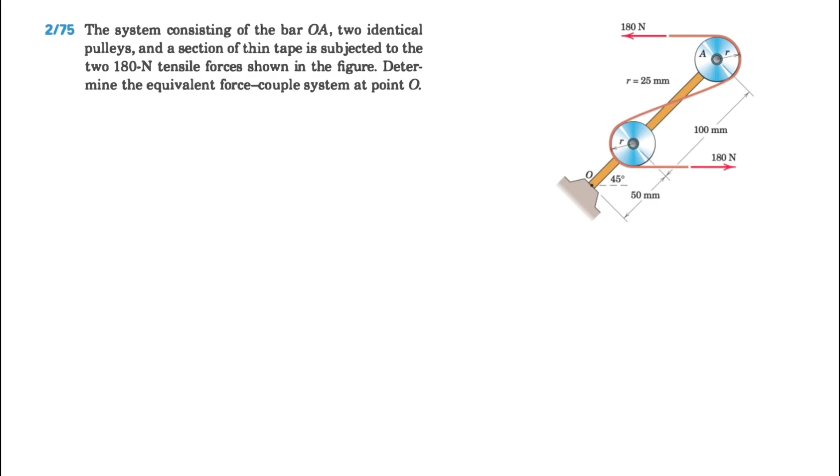So basically we have these two forces, and all we need to do here is to find the force couple system, meaning we need the force and a couple at the end of the question. The force part is pretty easy. We're going to go with the sum of all forces that we can see in the figure. We can call our x and y here. Looking at this, we'll see that the two forces are the same magnitude in the opposite direction and they are non-collinear, which means they're going to make a couple here.

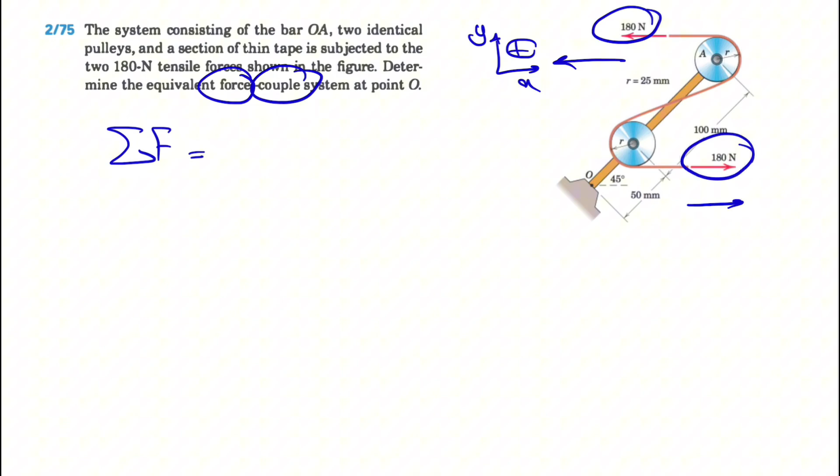So that's the definition of a couple: two forces that are equal, 180, they are in the opposite direction and they are non-collinear, meaning one of them is above the other one or they're not in the same line. So first of all, the sum of all forces will be 0 because the forces are equal and in opposite directions, they're going to cancel each other out, so 0 for that.

What we have basically is a couple of these two forces, and for a couple we have a different method for finding the moment. When we have a couple, we just need to use this formula, which is force times d, and we have to figure out what d is. The d is the distance between these two forces. So all we need to do here is to figure that out, and the rest should be easy.

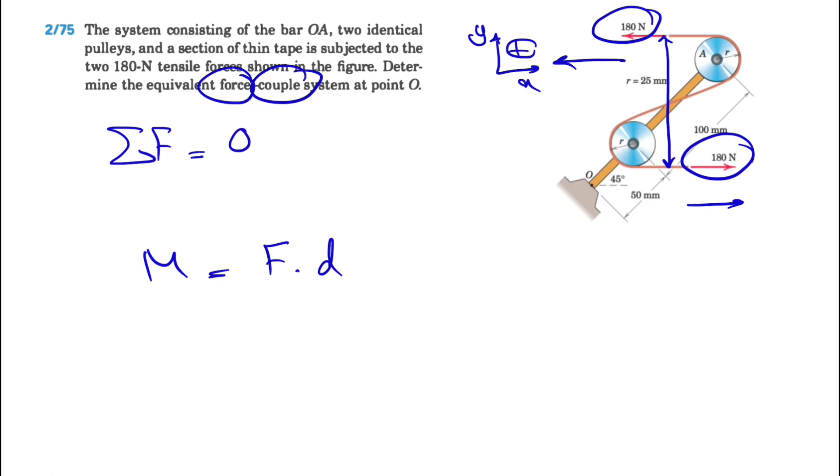So how are we going to find that? The way we're going to do this is to consider this right triangle that I'm showing in red. This angle here would be 45 degrees, and we know the hypotenuse here would be the radius of each of these plus this part. This part is 100 millimeter, so we basically have 100 millimeter plus 2r. If you want to calculate that, it's pretty easy. We basically have 100 plus 2 times 25, so the hypotenuse is 150.

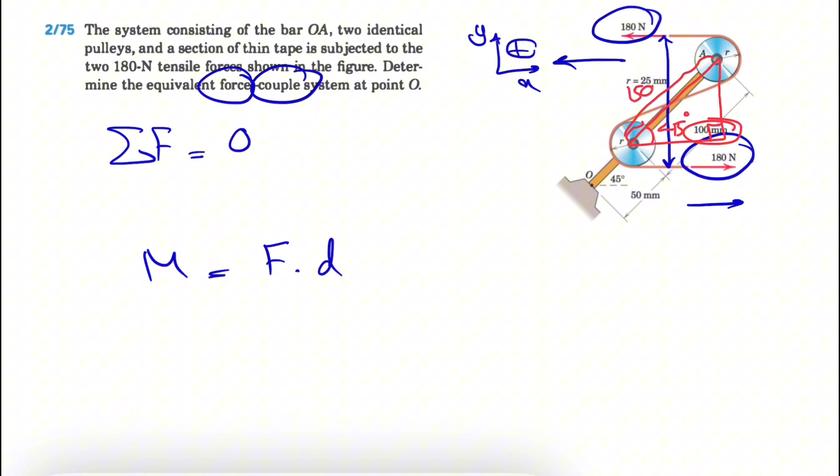So this is 150, and if you want to find our d, I'm going to show it in blue. Our d would be this distance, which is r, plus what we have here, plus another r. This part will be basically 150 sine of 45 degrees. We already have the force. The force is 180, and d would be 150 sine of 45 degrees plus 2r. Each r is 25, so plus 25 plus 25.

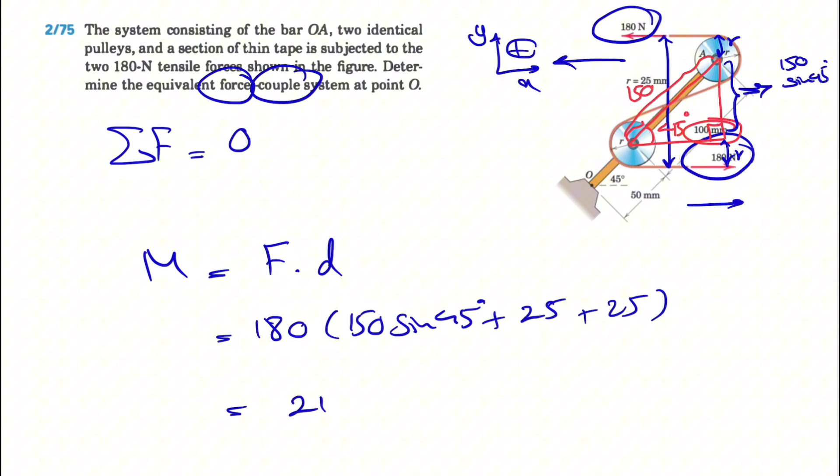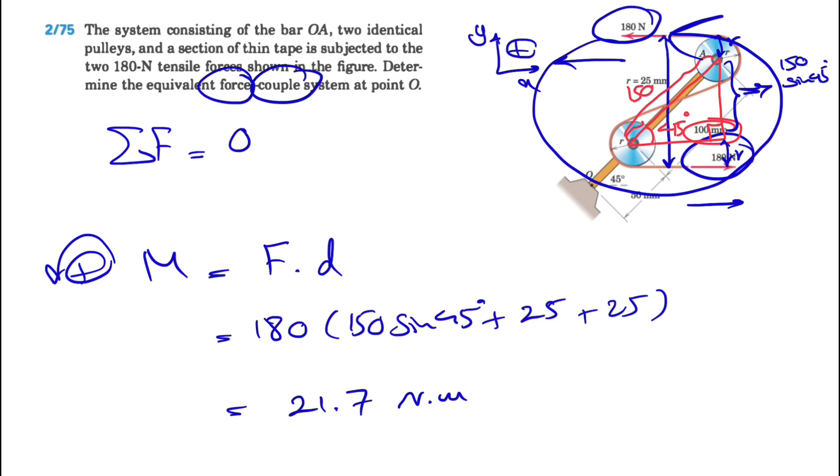If we calculate this, it's going to give us 21.7 Newton meter, and as we can see, the couple is in this direction. So counterclockwise; we're going to call counterclockwise moment positive as always. So counterclockwise, that's going to be our moment. That's one way to do it.

The other way would be to go straight with the moment about point O. If we do that, we need this distance here. For finding that, we basically have this distance here minus what we have here, which is r, and the other one would be basically 50 sine of 45 degrees. So that's one moment from this force, which, as we can see, is clockwise, negative.

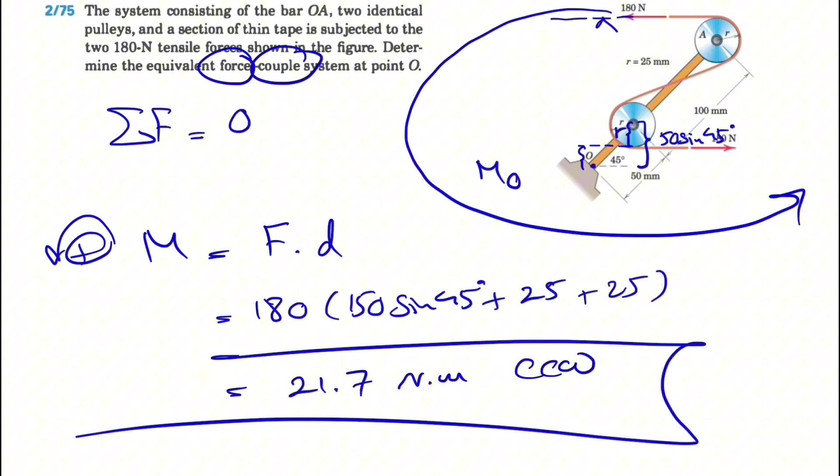The other one would be the moment of 180, which is going to be in this direction, so counterclockwise positive. If we want to find the distance from O to the line of action, which is here, we can take the bigger right triangle, and we know the hypotenuse is 150, so this will be 150 sine of 45 degrees plus r, and that's going to be another moment, a positive moment from the other force. So you guys maybe try that one out. Let me know if you get the same answer as what we got here.

Both of them work. The first one is way easier because it's coming from the definition of the couple, and we have to remember what a couple is, which is a moment produced by two equal forces in opposite directions that are non-collinear. That wraps it up for today's video.